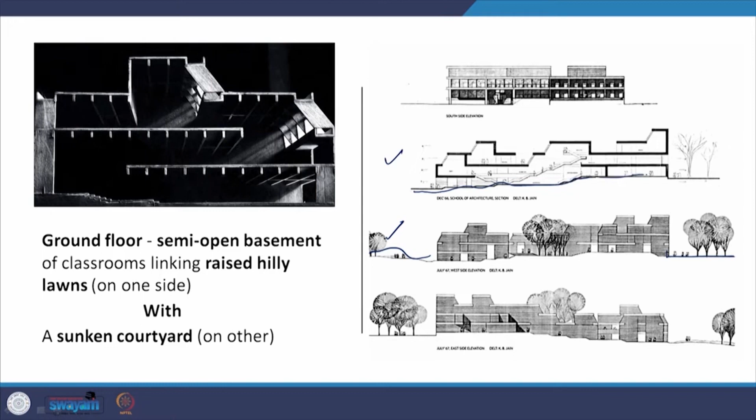This point will come back again in a project done by Bimal Patel in one of the future presentations. The ground floor is a semi-open basement of classrooms that are linked by raised hilly lawns. So, if you look at the elevation and the section, this side is the raised hilly lawn and this side is the sunken courtyard at the back, and the basement within this entire area is more or less connected from the front to the back.

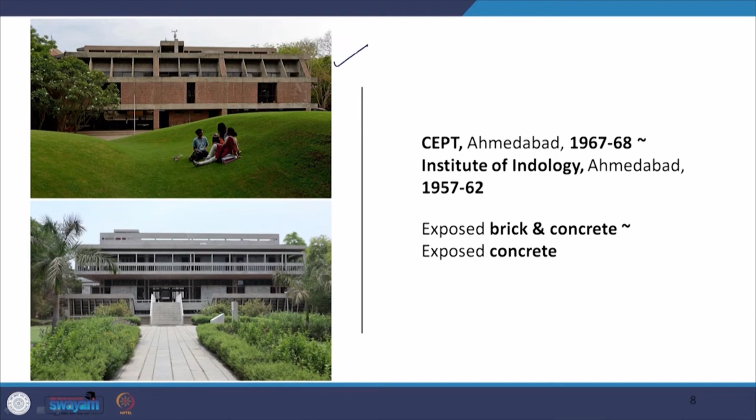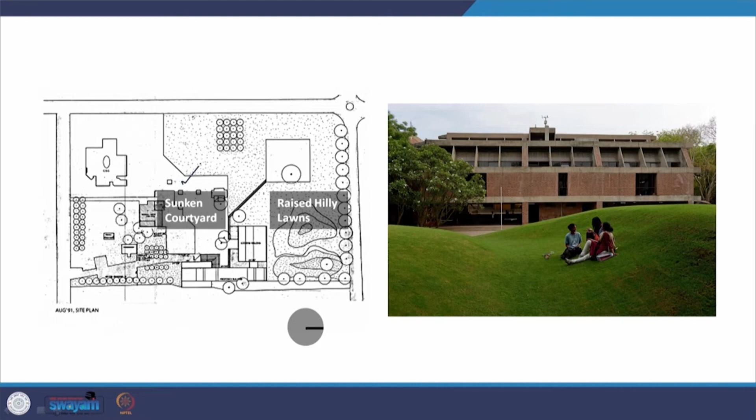Now, these images that we have seen earlier, if you go back, this is the image of the lawn in front, and this is the sunken courtyard at the back. Here again, if you look in the plan, the sunken courtyard is towards this side and the raised hilly lawns are towards this side. So, if you look at the actual plan of the building, this is where the raised hilly area or the lawn is, and this is the side of the courtyard, and these are the parallel bays, and the space just completely flows.

So, it is not just a flow of spaces for modularity and maintainability, it is not just an arrangement of spaces for easy flow of breeze and also the cutting of the sunlight, with the brise soleil etc. and deep shaded areas that have been used. It is also the educational philosophy behind the school, that there are unhampered spaces, there is a lot of freedom of interaction, as you can see from the way the studios have been arranged.

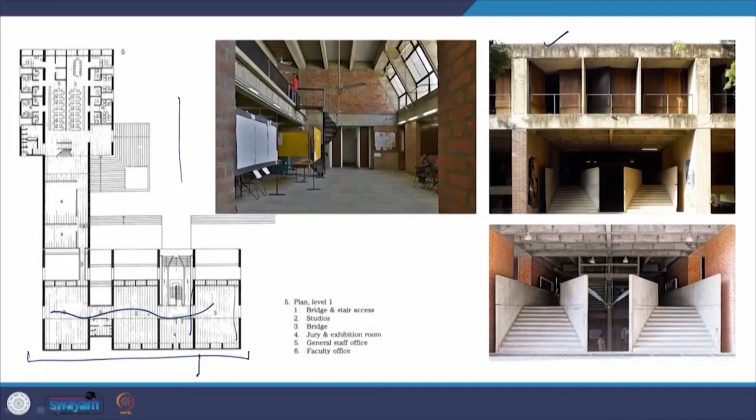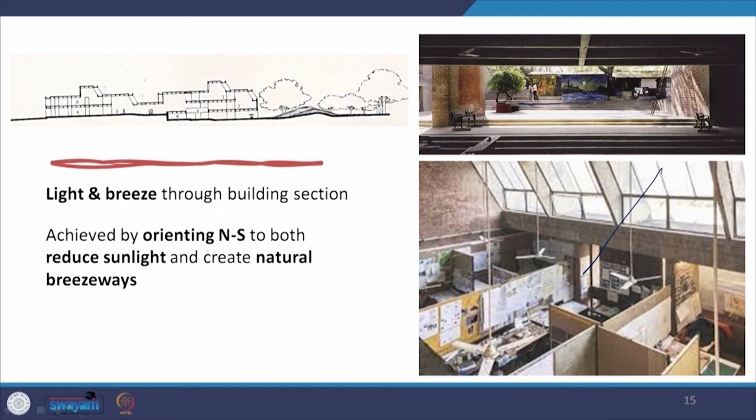So, light and breeze flow through the building section, and it is achieved because of this north-south orientation, and to reduce sunlight and create these breezeways, you have the advantage of getting north skylights into the studios. These are the deep shaded areas in the section, the space that is going underneath the building.

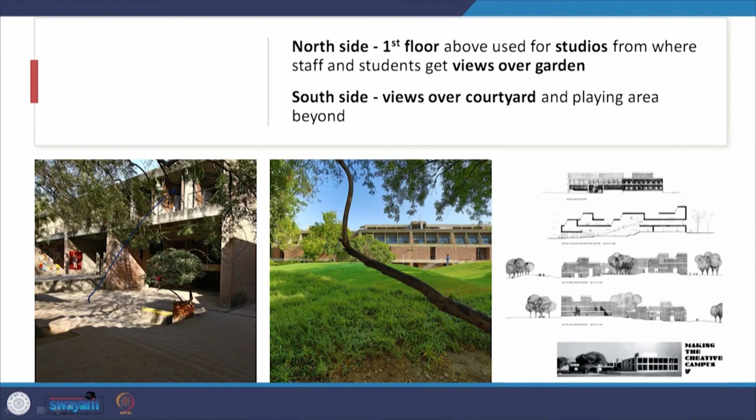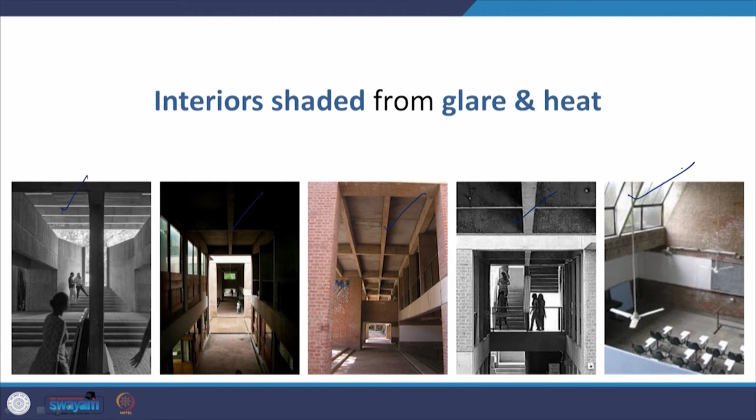On the north side, the first floor above is used for studios, from where the staff and students get a view of the garden, and on the south side you get a view of the courtyard and the playing area. So, from this side you are getting the view of the courtyard, and from this side you are getting the view of the garden. Interiors are shaded from glare and heat, very similar to what Louis Kahn had done. There are these deep shaded areas, and as you can see in all these images, there is light but not glare.

The north skylight, which is inclined, bringing light into the studios, is very similar to what Corbusier had done in the Chandigarh College of Architecture, using the north light to bring light into the studio. So, you have the skylight here as you see in CCA, and these are the skylights that you see in the School of Architecture CEPT.

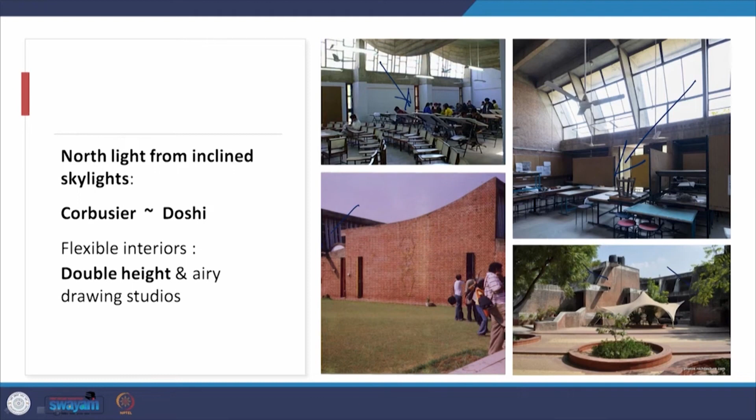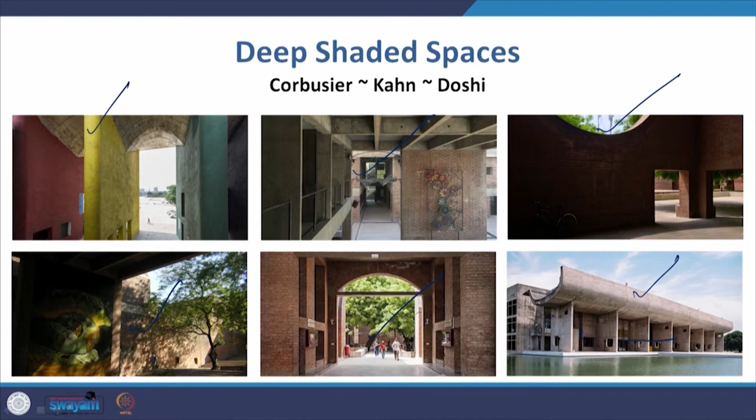Deep shaded spaces were something that we find in the work of Corbusier and Kahn, and then in the work of Doshi. These are the deep shaded spaces that you find in the High Court building in Chandigarh, and even in the Assembly building here, and then you find it in Ahmedabad here, and here, and these are two spaces that are from the School of Architecture Ahmedabad. In fact, when I just juxtaposed here, it actually goes to show that in the space creation using exposed brick and concrete, when you photograph them and put them together, there is a lot of similarity between them.

Interestingly, all these projects in these pictures are in Ahmedabad: Villa Shodhan, Sarabhai House, and the School of Architecture at CEPT. There are also levels that play an important role and create a lot of interest in the spaces, and the brise soleil. You find the brise soleil here in IIM Ahmedabad, in the faculty wing of IIM Ahmedabad, in the Villa Shodhan, in the Mill Owners Association building, and in the School of Architecture also.

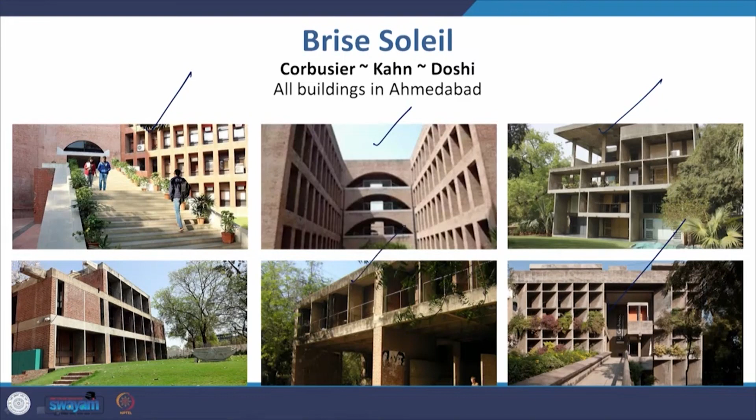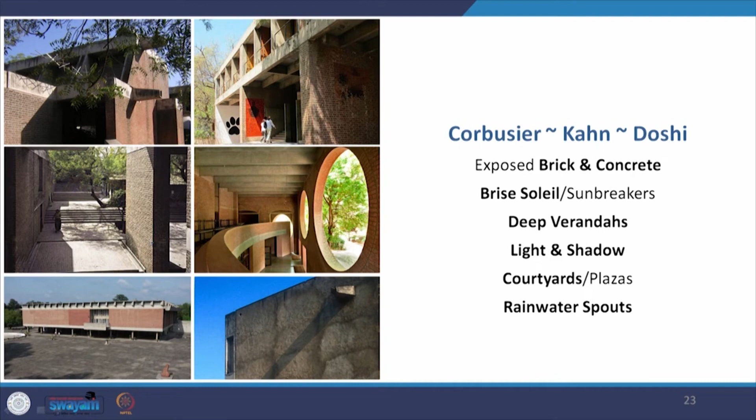Then again, if we put these points together, the comparison of the works of Kahn, Corbusier and Doshi: exposed brick and concrete, sunbreakers or brise soleil, deep shaded areas or deep verandas, the play of light and shadow, courtyards and rainwater spouts.

You find a similar modern concept of the Ahmedabad pol entranceway in CEPT. According to Doshi, the CEPT building is raised from the ground like the Villa Savoye here and the Unité d'Habitation, both by Corbusier, that is on the pilotis.

But if you see the Unité d'Habitation, when it is raised on the pilotis, the space is probably only used for parking. In the Villa Savoye, the ground level is used for parking and for certain service areas. But in CEPT Ahmedabad, they become multifunctional with sun protection and breeze exposure. So there is a greater use of these spaces in CEPT.

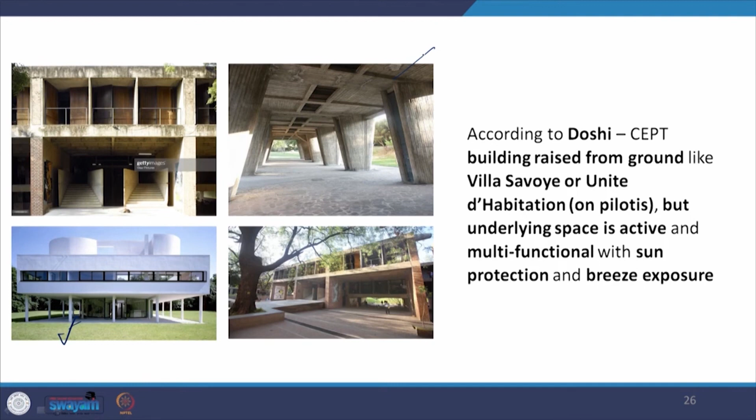Now CEPT itself has shaped the thinking of younger architects. This building plays the dual role that Bauhaus played, that it is not only a building from which we learn about architecture, and it presents to us the ideas that were growing at that time in India. Like for Bauhaus, it was the international style modernism, functionalism that was growing in Europe and then spread all over the globe. But the Bauhaus itself was an education institution of architecture which laid the foundation of modern architectural study.

CEPT is one of the institutions that has played that similar role in India. So the building is an education, and the institution itself is important for architectural education. So the influence of Louis Kahn spreads to other post-Kahn buildings. Okay, so I'll just tell you about this particular project.

The influence of Louis Kahn: there are several post-Kahn Indian buildings that show obvious impact through building elements, exposed materials, etc. So you have works by Sen Kapadia, B.V. Doshi, Anant Raje, but also there is a more subtle impact of his design principles. For example, even in CEPT, to a large extent, you don't see direct visual imitation of the works of Kahn. You don't see arches, for example.

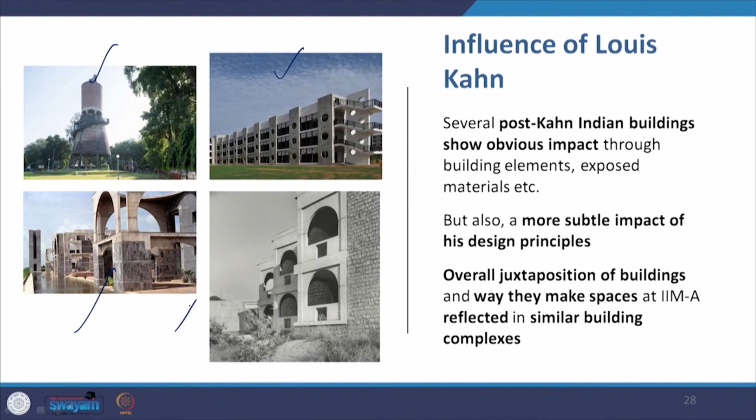But in certain cases there is a more clear-cut impression of his work in, for example, the works of Anant Raje or a project of Bimal Patel called EDII that we will look at in the days ahead. But the overall juxtaposition of buildings and the way the spaces were made in IIM Ahmedabad are reflected in similar building complexes by these architects.

One of the projects is the Gujarat State Fertilizers Corporation township that came up in Baroda, that is Vadodara, from 64 to 69. The whole complex has a diagonal geometry akin to what Louis Kahn had done in IIM Ahmedabad. This is the diagonal where the housing has been placed. As you can see here in this aerial view, these are the diagonals, and all these are going towards a central space.

The pedestrian paths which are diagonal are all leading to a central space which has the public buildings, the school, the bank, the post office, etc., the commercial premises, and there is a water tower which is the focal point of this central space. This is the water tower here, and this is the central space in between the housing areas.

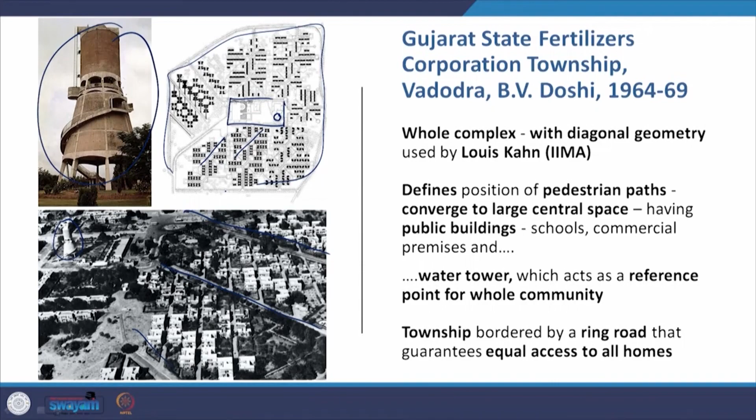So, the township is bordered by a ring road which is all around it, so that it guarantees equal access to all the homes. The housing units designed by Doshi here were of 8 different types organized in 3 districts which are based on different economic conditions. So, there is, for example, level 1 to level 7, level 8 that goes downwards in the total area allotted to each house based on the economic status of the occupant.

The housing integrates traditional Indian construction technology and modernism, something that was also there in the works of Corbusier and Kahn. They brought in modernism, but they adopted Indian construction technology and materials.

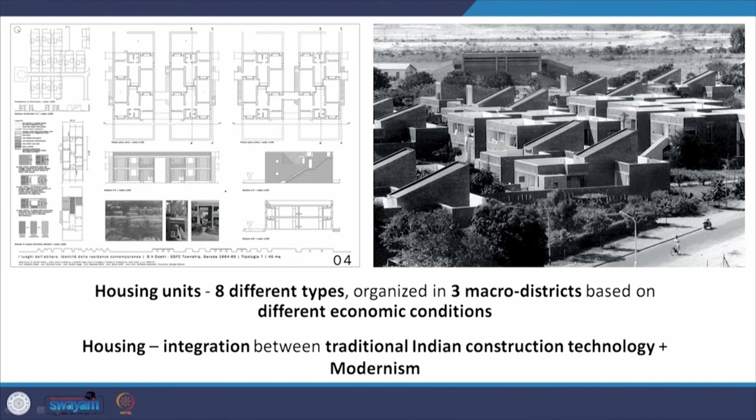So, we will stop here, but I will make one point here. By this time, at the end of the 1960s, the ideas of these Indian architects start crystallizing with an Indian identity in it. I will highlight this in the later presentations, where I will show you how the core ideas remained, but the vocabulary shifted tremendously, more and more suited to the local or regional context. So, I will stop here and we will pick up from here and look at some more buildings which are impacted by the works of Louis Kahn.